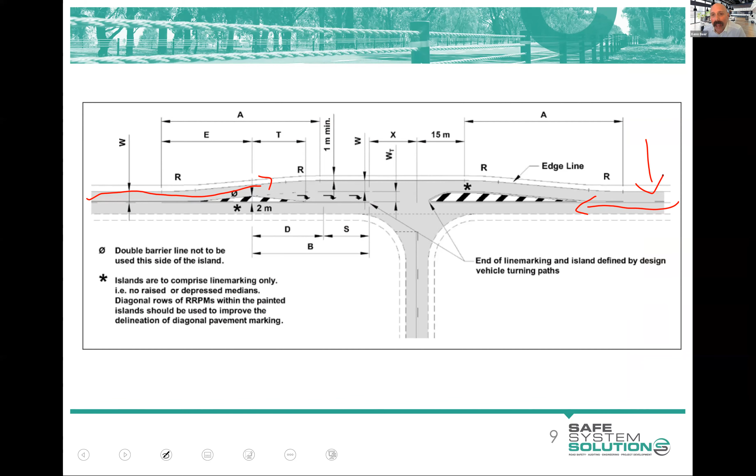And you look at it for a while and you can see here that they've got the overtaking opportunity, if appropriate, opens up as you exit the facility, right?

This one has you overtaking potentially on the approach to this. It's not good. No, it's not good at all.

And finally, it sort of dawned on us that somebody's just sort of flipped the design. And why on earth would they do that?

Well, pretty sure it's got some heavy services running up and down here. And if we go back, over here is a big subdivision. And of course, they don't want to move services.

That sounds expensive. And so that somehow slipped through the net on an arterial road and been built that way. Now, I suppose I'll just leave it at that.

It's one where we did give it intolerable risk, and actually didn't wait that sort of two weeks to write up a nice, very nice flowing report. We immediately phoned through and said, okay, do something immediately out here and we'll get you the report when we can, but something needs to be done.

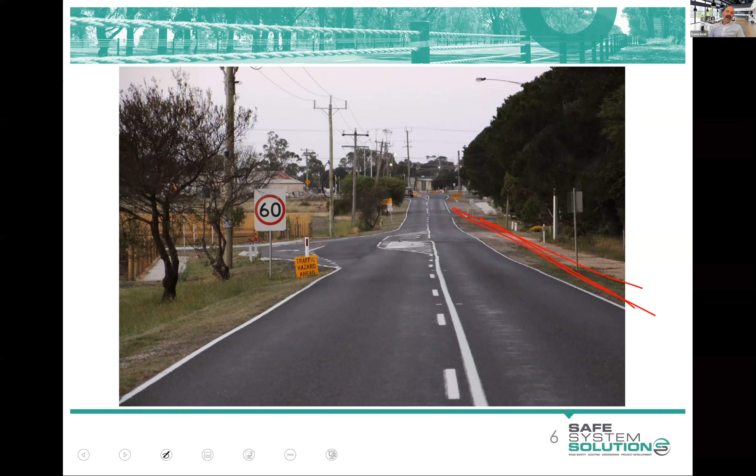So it's an interesting one. It's the kind of thing you wouldn't expect to see, but you've got to be very aware as auditors that these sort of things can and still do happen, unfortunately.

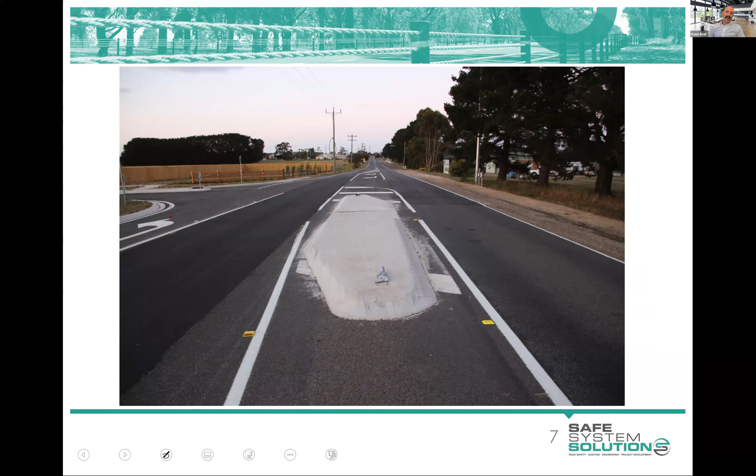I'll jump on to another one.

This one is nowhere near, like, definitely not intolerable risk. Don't know what the risk would be, but it's something that annoys me, and I scratch my head about it, which is the use of incorrect signage, the use of regulatory speed signs in inappropriate locations.

But what makes me more concerned are these ones where we see people putting a regulatory speed limit on a high-speed road on the approach to a point where you have to stop or give way. You don't have priority. The reason this is particularly concerning as an auditor is there's this subtle clue to a driver that if they see a speed sign, their road continues on. So in the fog or the dark or somebody's half asleep, they see that, it's not warning them that they're going to have to stop. It's actually doing the opposite. They won't be able to verbalize that, it's subconscious. But we really don't want speed signs on the approach to points where yielding, giving way, or stopping is required.

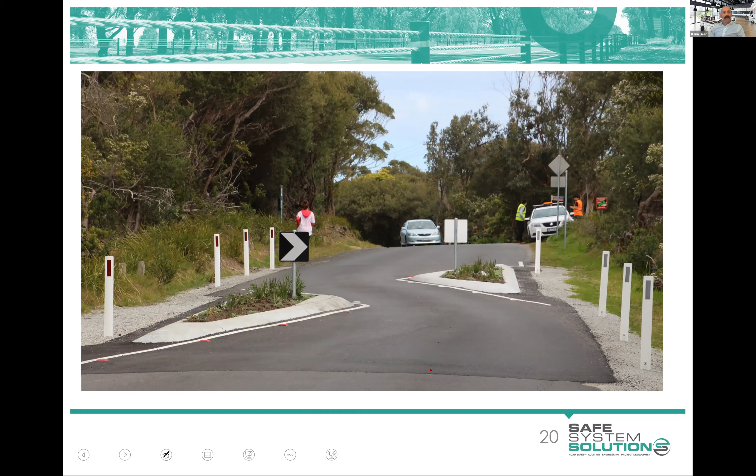Anyway, that's an aside. Just another reminder about end terminals. End terminals are quite an important part of any barrier system. They can present hazards in their own right. And it's one I find where auditors really need to be on their game and up with the current latest thinking around end terminals to barriers. So if you've got a barrier job and you're not a barrier person or you're not up to speed, you have to get into your audit team somebody who knows what they're doing, or make sure you're seeking the right advice.

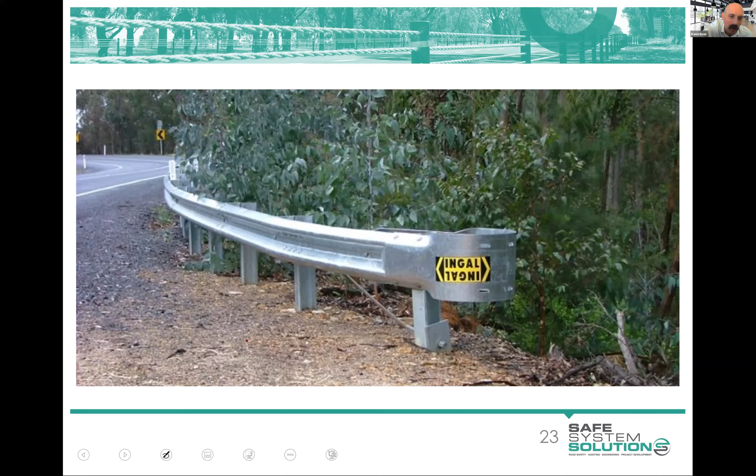So there's sort of your trailing terminal. And this was an example of an audit - I won't read the details of it, but they've used a trailing terminal here, here, and here over this aqueduct. Now, of course, a trailing terminal is not designed to be struck end on, but they've got it on the approach there. And also, this is an undivided road, no separating barrier. It's outside of the old clear zone, but it's very easily on the outside of a curve that somebody could slide out there and hit that barrier system.

So you've got to be aware of that. Interestingly, with this one, my colleagues did this sort of report, and they put in here an interesting thing: consider the use of a GREAT terminal - GREAT being a Victorian term for gating redirected energy absorbing terminal on all barrier terminals. If the access point is constrained, consider moving the access point or measures to reduce the spearing potential. So the auditors have acknowledged the reason why they've done this is that there's an access point here, so they're trying to help out a little bit in that sense.

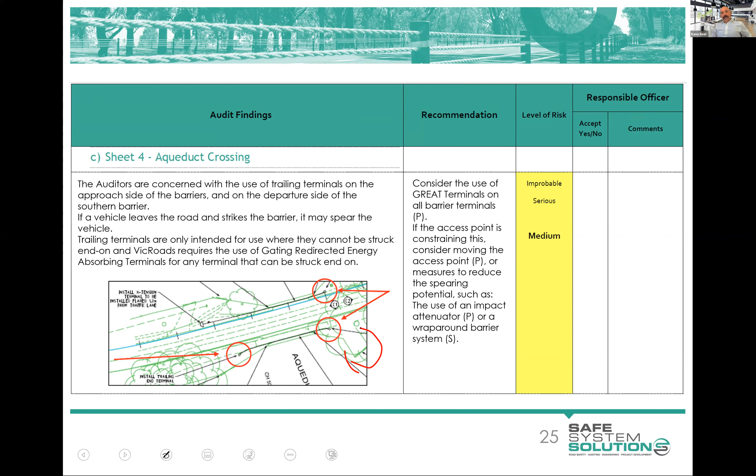But we don't want to see ramp down terminals. They are a vaulting hazard, so a vehicle will vault off that if struck. So that's a no-no. We don't want to see BCTAs and BCTBs anymore.

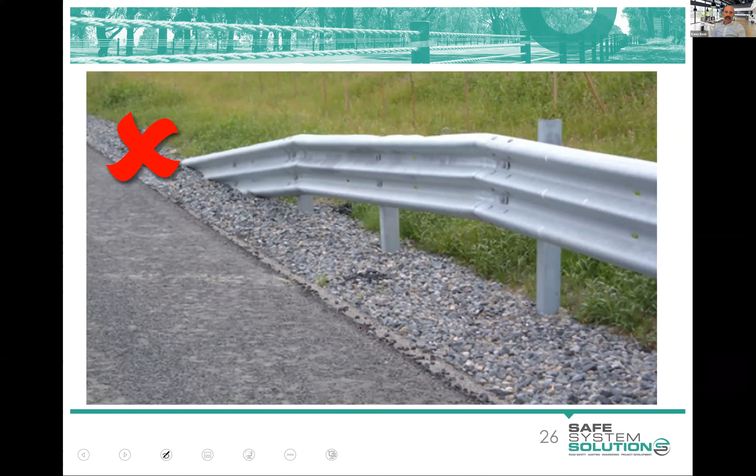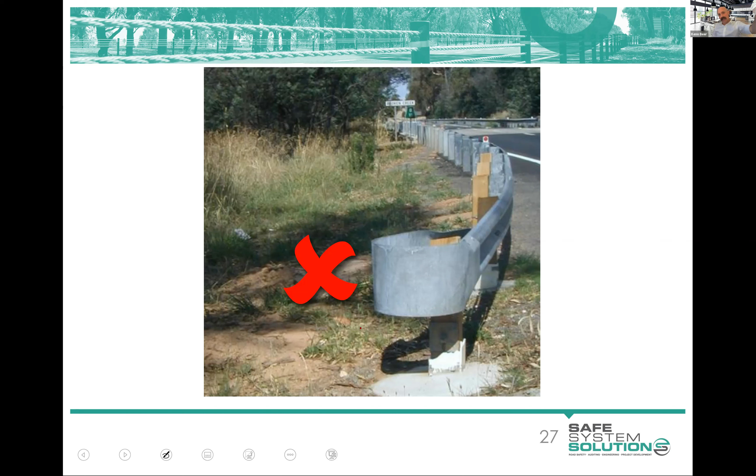They're the breakaway cable terminals. Again, they've got spearing hazards in them, and they protect a lesser area. But this is an audit, a post-opening audit not that long ago, where they're clearly not the product that we use, but they're out there. So as an auditor, you've got to be saying, yeah, you've used a product that doesn't meet standards.

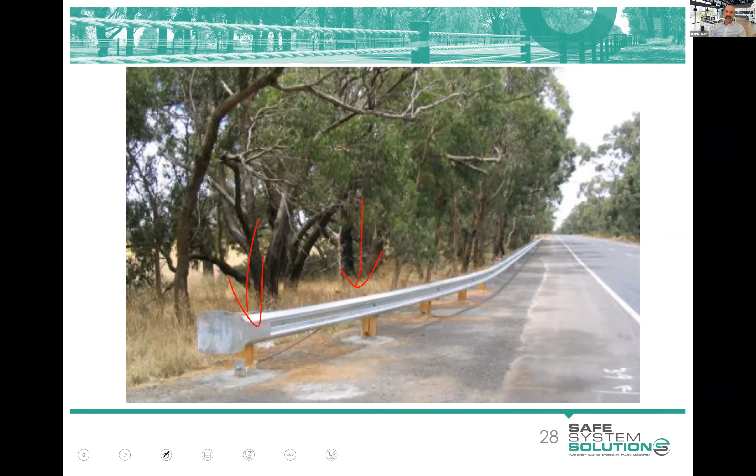So this one actually has a standard associated with it. There's safer things that can be done. Certainly this is not a safer thing to do, a fishtail. I'm pretty sure most of you know that. We see those a lot popping out in different countries.

Random little question for you, I've got a couple of minutes for trivia. See these things? We'd call them audio tactile edge line. Hang on, somebody asked me to go back to that one. It's scary stuff, isn't it? Anyway, we'd call that audio tactile edge line.

In this country, they've been scouring it out of the road as little dig outs like that. Why do you think they might do that in this country? They actually call them mumble strips. We call them audio tactile edge line. The public calls them a rumble strip, which is not a rumble strip - a rumble strip goes over the traffic lane, but they call that a mumble strip as a thing. Why do you think they might dig them into the ground as opposed to have them as blobs on top, which we do? Yes, so Chantel's right.

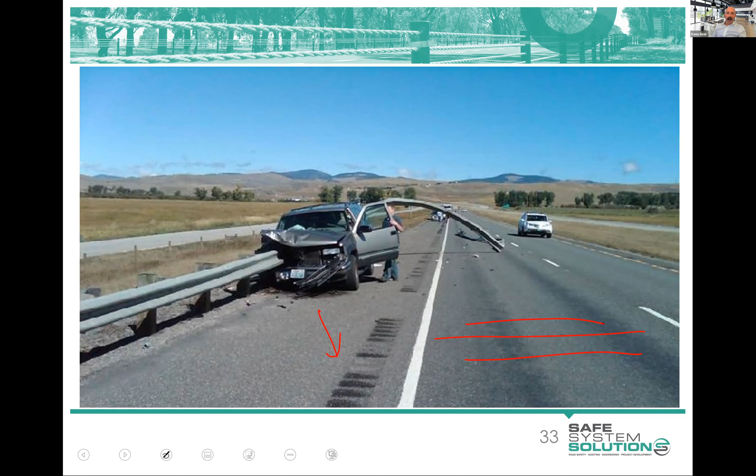No, see, we're all from a country - we've never had to manage a road that gets snow all the time. But you've got to snow plow your roads, don't you? And anything that sits above the surface there just gets ripped off with a snow plow. This is in Colorado - I was over there doing a little bit of work at CDOT, and I said, well, how do you do raised reflective pavement markers or anything like that? And they're like, oh yeah, we've got the snowplow friendly RRPMs. So that's pretty cool.

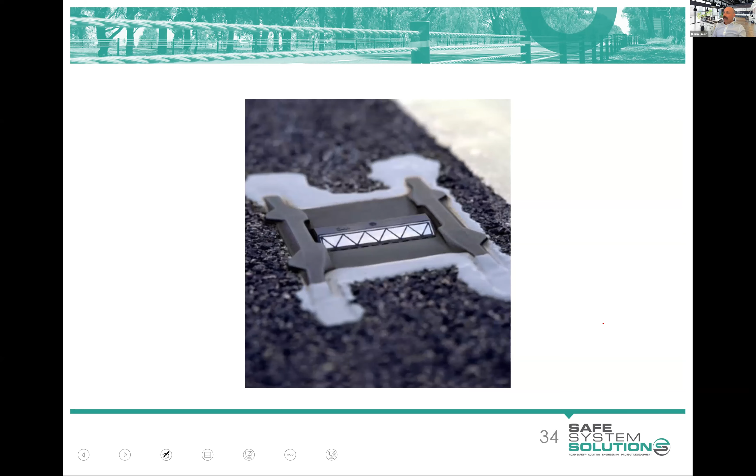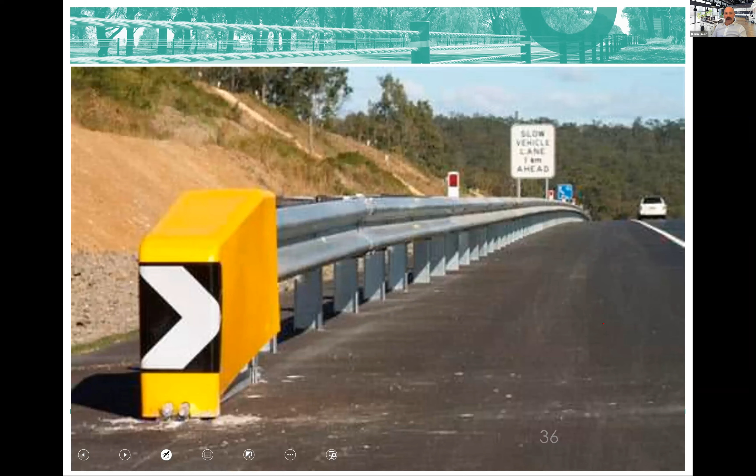Anyway, yeah, so barrier end terminal - I went off track there. So there's a closer generation to what we accept these days, these aren't really quite good, but they're just a little bit old, so we still don't want to see the ET2000s and the X350s, and this is where we're at now with the ETSSs. That's the current terminal. I'm not expecting you to remember this, I'm just warning you - you've got to know these systems, and there's a couple of others that are accepted.

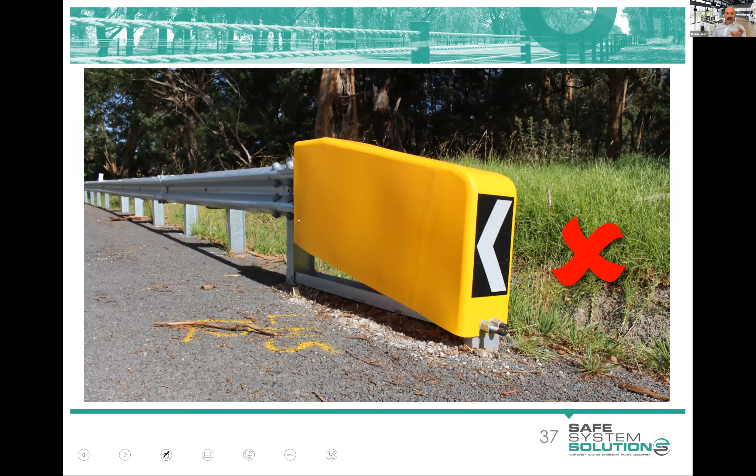So first of all, I want to thank everybody for taking time out of their very busy lives to have a bit of a think about road safety. It's such an important topic, and it's something that I just absolutely love - the ability to utilize some of the engineering skills that we've developed over time to improve the health and safety of the community. So it's a really rewarding thing, and I'm glad that some of you have been in it for a while, some of you are just entering into it.

It's super rewarding, but it comes with a lot of challenges. We get a lot of pushback, a lot of perceptions of how things should be done, so we've got to keep fighting the good fight. But thank you so much for taking the time to do that.

Road safety auditing is a wonderful tool, and utilize the fact that you are an auditor to have input on designs, challenge things that even if they meet the standard you're concerned about. That is what we've got to do, and you've got to speak up.

As an auditor, you've got an extra responsibility now. I know you were passionate road safety advocates beforehand, but you've got an extra responsibility now that you're in the fraternity of road safety auditors, and we are eyes out there on the network all the time. So if you see something in that high intolerable risk category, get in contact with that road authority, whoever's managing that road, and alert them to the fact.